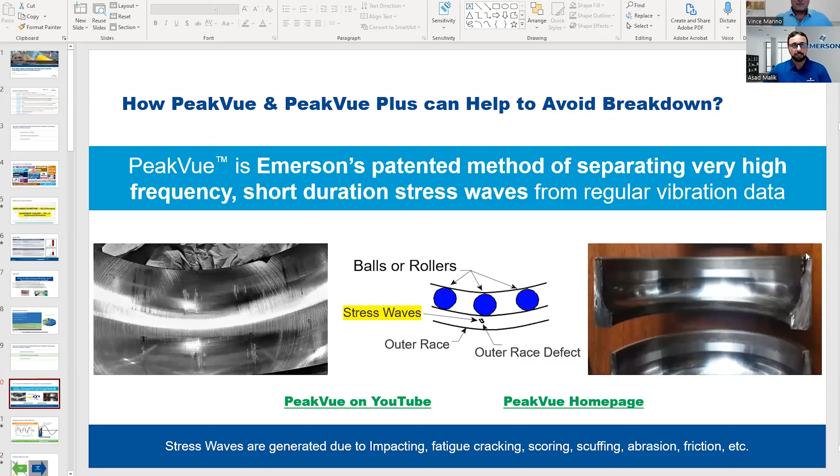Do you have a visual picture of PeakVue? Anything we can pull up to take a look at? Absolutely, not a problem. Let me share a screen, because sometimes we say seeing is believing, so I'll show that.

Do you see my screen, Vince? I do. I'm just adjusting where we are on the screen a little bit so I'm not covering up any vital information. Let me do this. Okay, all right, yes, please continue.

So PeakVue is a very specific patent technology, a special method of separating very high frequency data, also called stress wave data, from the low frequency data. The low frequency faults are things like unbalance, misalignment, and looseness, which are normally picked up through the velocity spectrum using different products. When it comes to very specific high frequency information, those very short duration events in bearings specifically, we use a specific filter.

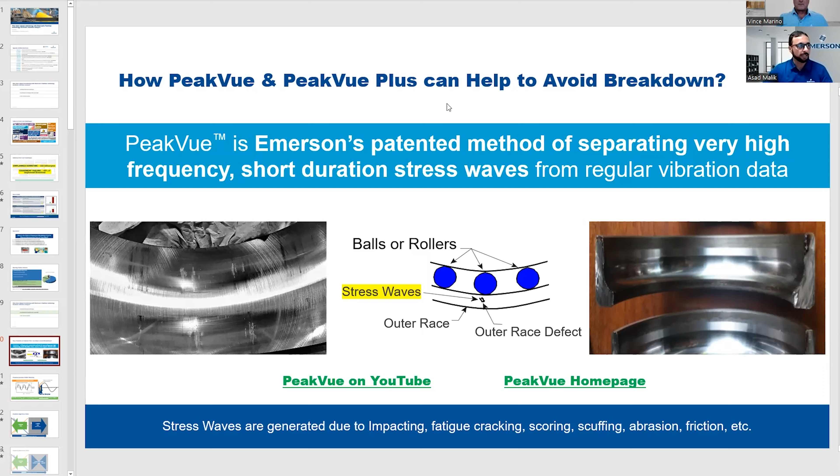Maybe on the next slide I can show a bit more about how it's used. If you see, the sampling rate of that technology is around 100,000 samples per second, whereas normal vibration data collection uses around 2,500 to 5,000 samples. So PeakVue Plus uses a very high sampling rate, about 20 times more than normal velocity data collection.

If you see on the screen, this is the sampling method. Any short duration peak that comes in will be detected and held as is. So these are a few things specific to PeakVue: using a very high sampling rate, a specific technique inside, and a high pass filter to bring that data to the analyst in a way that makes it trendable.

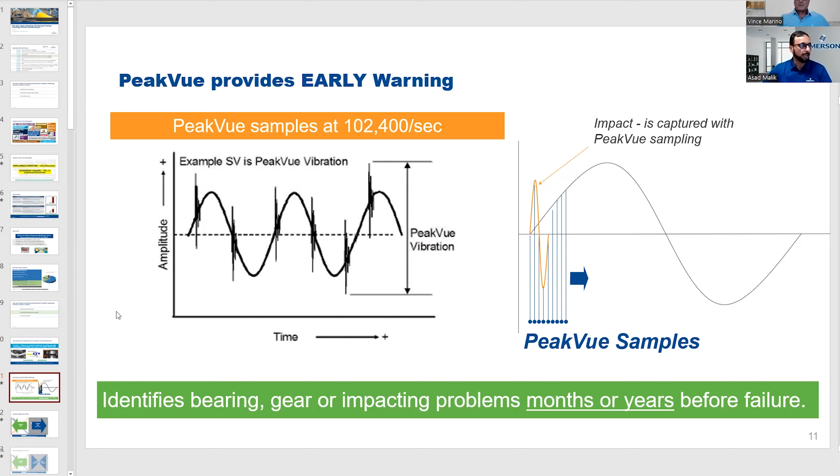When we talk about rolling element bearings, they normally have four stages of failure: stage 1, 2, 3, and 4. After stage 3, the bearing becomes unpredictable. It can fail today or tomorrow—you cannot predict it. If you get that predictive knowledge at that stage, it's already too late.

The purpose of all these predictive technologies is to know about the bearing or lubrication fault at stage 2, sometimes stage 1, so that you have good time—months or weeks—to plan, because breakdowns are very expensive. You need to change resources, and sometimes the parts are not available. So the earlier the information, the better it is to avoid any failure.

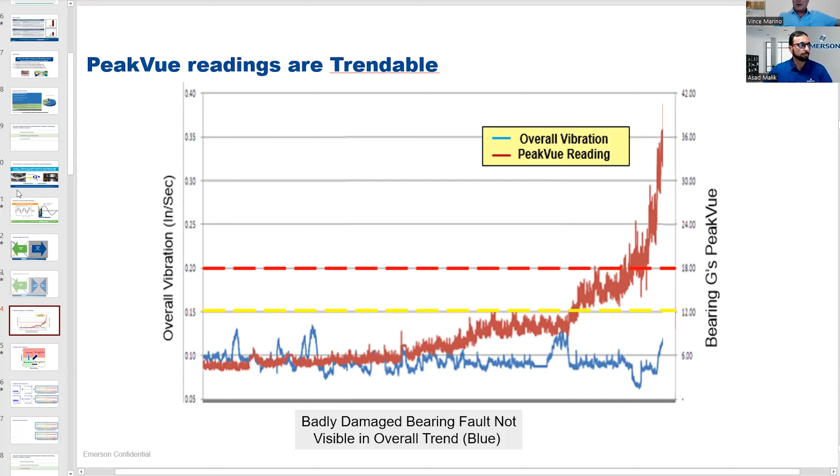I have data to maybe share later on. Actually, I'd like to go down that rabbit hole if I can, and just ask you—pre-PeakVue, how much cost and financial impact was company X experiencing, and how did that change after installing PeakVue? Is it something... yeah, here you go, it looks like you have some measurements here. I'm going to move this out of the way a little bit.

This unplanned downtime cost does not include the production loss. This is the cost they have to pay by arranging the crane for replacement, arranging the crew, paying overtime, and sometimes when you have a breakdown, rather than 2 people, you want to put 3 or 4 people to complete the job as fast as possible. But 25 to 50% of the resources are wasted even before you start dismantling the machine.

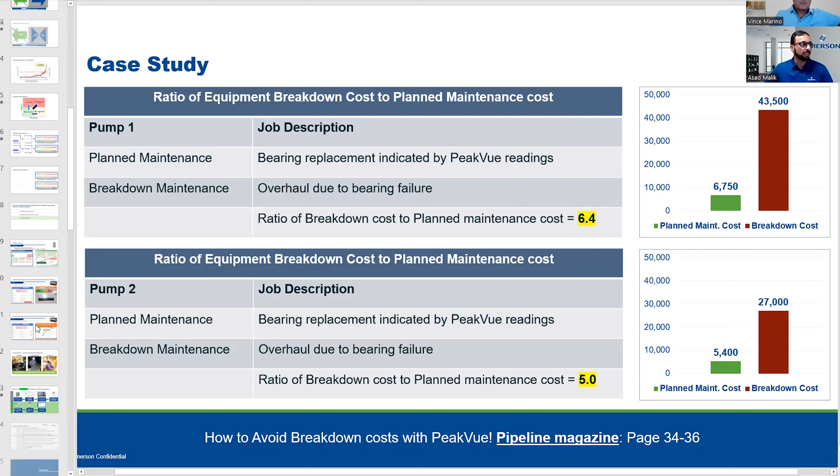I can share, I have even some case studies, very interesting case studies. Yeah, I'd love to see these. This is the kind of thing that, inevitably, every time I do a lunch and learn, my main focus and my goal is to preserve information for the future. Hopefully someday somebody will search on YouTube for a solution like this and find this a valuable resource. So the only way to do it is really to just talk through it.

Now this is an actual case study. Before I go into PeakVue, I also want to talk about PeakVue Plus, which you'll see here. PeakVue Plus is part of the analytics built in by Emerson, so that any person who doesn't have much advanced or category 2 level experience in vibration analysis can easily understand. Let me take you through this example, and you'll see - even if you're not a vibration analyst, you can look at that graph and say, oh yeah, I can understand there is a problem.

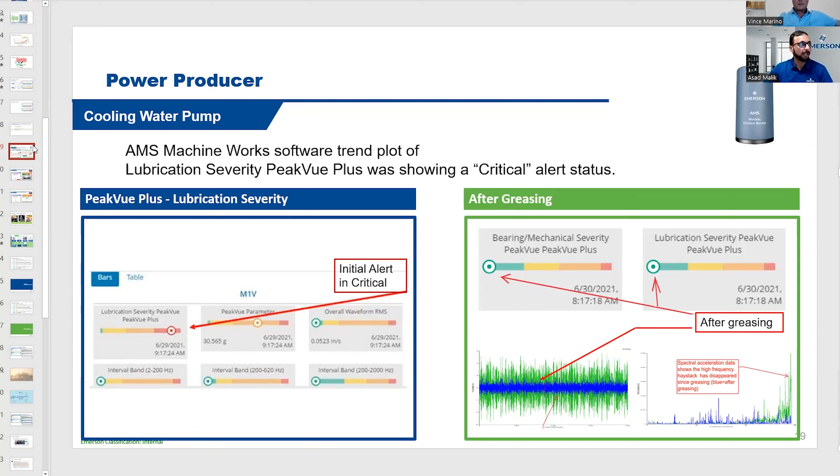Maybe during our conversation I'll give you a quick detail of what's happening in the background to bring this. Sure, yeah, go ahead. Let's just dive right in.

I'm loving this. So that device you were showing, is it magnetically attached, or can it be attached virtually anywhere on the rotating equipment? Absolutely, it can be magnetically attached or it can be screwed. There are different ways you can install it.

It makes me wonder why virtually every piece of moving equipment doesn't have that on there, or something similar, to monitor, instead of just waiting for the screwdriver technique later, which means it's too far gone. I would imagine more of your high value items are where it's necessarily needed, but virtually anything could utilize that and benefit from it.

Yes, Vince, that's really an interesting time for the industry. If you ask me 10 or 15 years ago, the wireless technology, pervasive sensing, was not mature enough. Now these wireless devices can reduce that timeframe for moving from bottom performers to top performers by using these different wireless technologies and getting insight.

And people are not really much interested, especially the new millennials as well as the new people coming to the industry. They don't really want to go collect the routes.

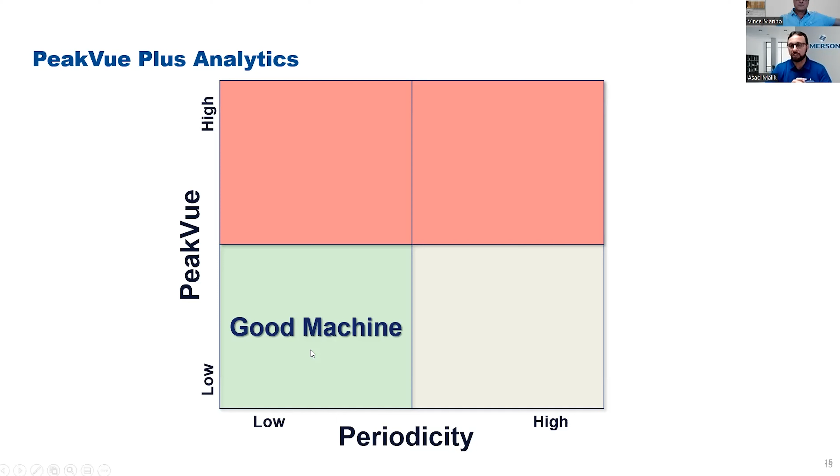But now, as the impacting increases, like in the previous chart I was showing, the green impacting was really at 30, but the repeatability is not much, it's low—then that means it's a lubrication problem.

Now if we have low impacting but high repeatability, meaning the signal is repeating on that same frequency, and that impacting is even low, that means there's a bearing problem, but lubrication is not the problem. But this is at an early stage.

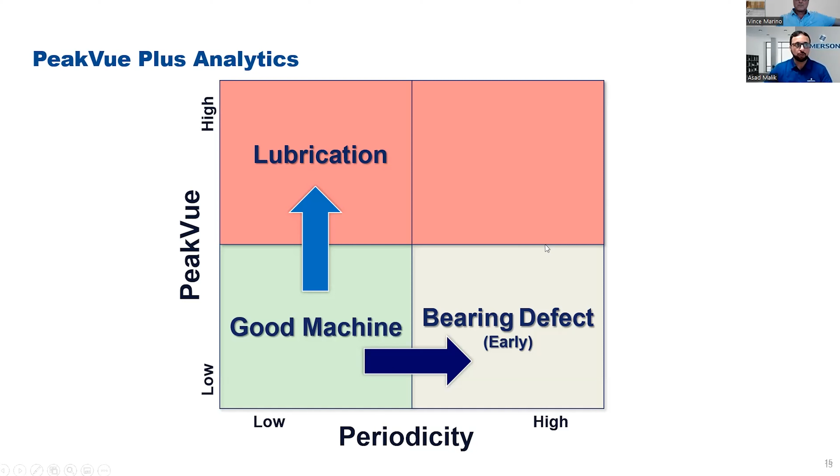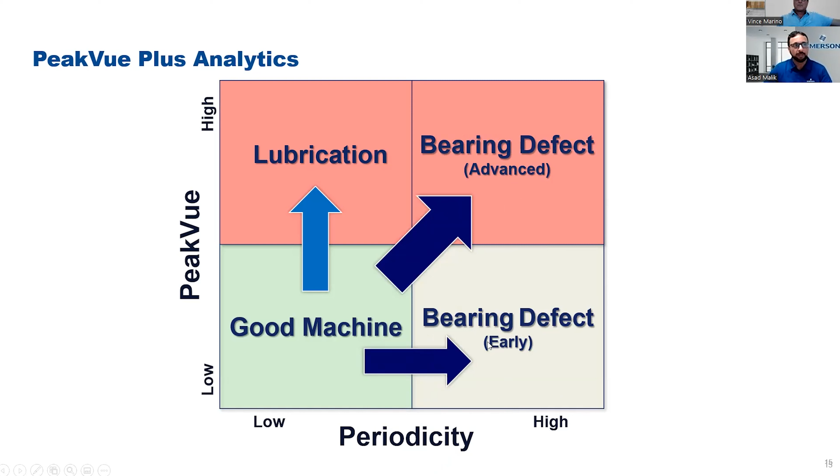Now think of a situation when you have high impacting but low repeatability of that signal, and a high repeatability of that signal. It means now you move from early stage to the advanced stage. And that's all happening behind the scene of PeakVue Plus.

Let me explain this on the chart. On the left-hand side, high impacting, low correlation, means there is an under-lubricated bearing. You will see the lubrication severity, but no damage to the bearing. In the second scenario, we have high impacting but also very high correlation. That means probably the lubrication is great, but in spite of good lubrication, the bearing is damaged.

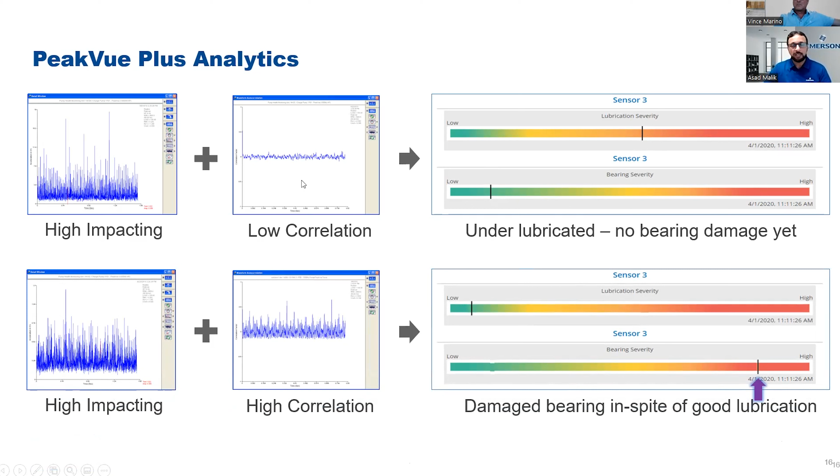The left-hand side is more for an analyst type. If I remove that, and you have no knowledge of vibration, you can look into this green, yellow, red and still tell what's the problem. That's what PeakVue Plus is doing behind the scene, giving prescriptive analytics to operators, maintenance people, or condition monitoring people, so they can distinguish between a lubrication and bearing problem and address it separately to fix. In my previous case study, where there was a problem in the lubrication but the bearing was good, they greased the bearing and the machine was running fine.

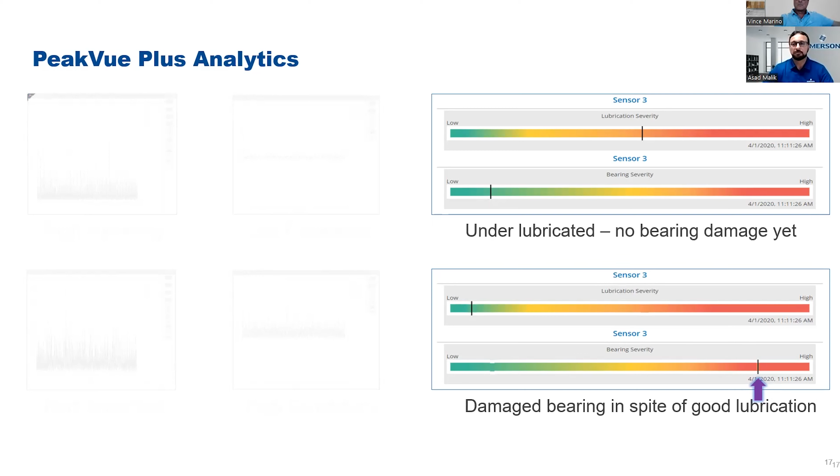I want to show you one more case study now, because this is the Asset Monitor, which is comparatively for semi-critical machines. You can have around 12 channels. Like the wireless vibration monitor, which was a small one where you could have a 3-axis sensor plus temperature, but this one can have 12.

Now this is again a case study with the help of PeakVue Plus. If you see on your left-hand side on the lubrication chart, alignment, bearing, looseness are all green. Balance is green, blade pass frequencies are green, but lubrication is red. And all this is because of PeakVue Plus.

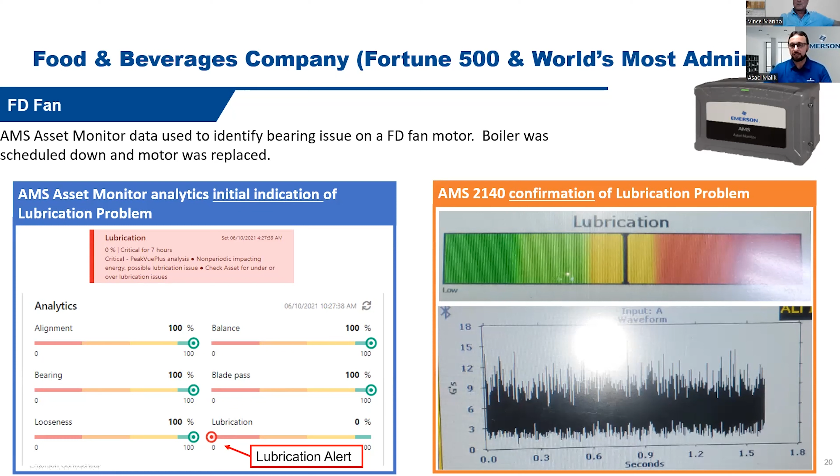Luckily they had a portable analyzer. They used it for exception analysis and found there was impacting. In this case, unfortunately, the bearing was sealed, so they had to replace the bearing. They actually had to replace the whole motor, then change the motor. They could also replace just the bearing, but they have to stop the machine. So they really needed a stoppage. There was no way to grease the bearing while the machine was running, so they had to replace it.

But after replacing the bearing, they rechecked it again with the Asset Monitor, and the lubrication is now green. All other indications were already green. Even if they were not much expert on vibration analysis, they could immediately get the idea from the prescriptive analytics that there really is no problem, because all of the indications are showing green. So very, very helpful.

It's really resonating with the customer needs, and I have received very good feedback whenever we have been talking to customers who had been using PeakVue in the past. They like PeakVue Plus, and PeakVue Plus is built into all the software as well as the hardware.

These screens are basically a software dashboard they can use. With this AMS Asset Monitor, they just need an IP address and they can log in and see live data without needing software. But if they really want to store this information for history, they can use our AMS Machinery Manager software to keep that data safe.

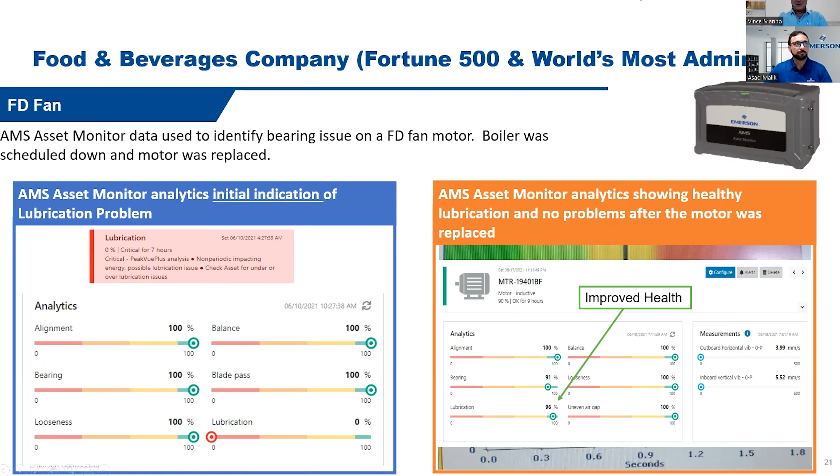Is that correct? It is, yes. So she's using just a smartphone. Yes, that's the beauty of this technology.

You see on the top, the Asset Monitor is installed and it's an edge device. You can get data as close as possible to the machine, install it close to the machine, and that's it. You can get data and transfer it wirelessly. What she's using is an iPhone or a Samsung or Apple phone, and you can get all that information on your phone. So you have the asset health right on your hand, and based on that you can take actions to plan your maintenance activities. Very cool.

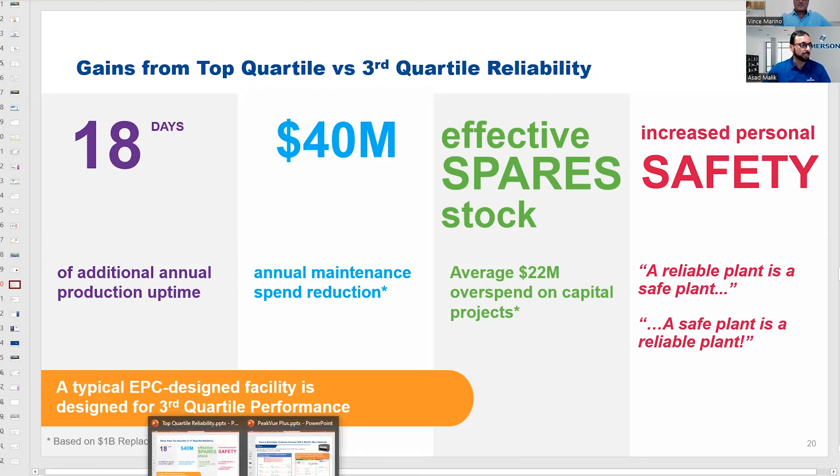Rather than taking the manual shift, the digital transformation brings the data to the person so they can analyze it. That was a quick shift. Maybe I can share something that came into my mind, because you asked about the latest trend. What's really the latest trend? And you can still see my screen, right, Vince?

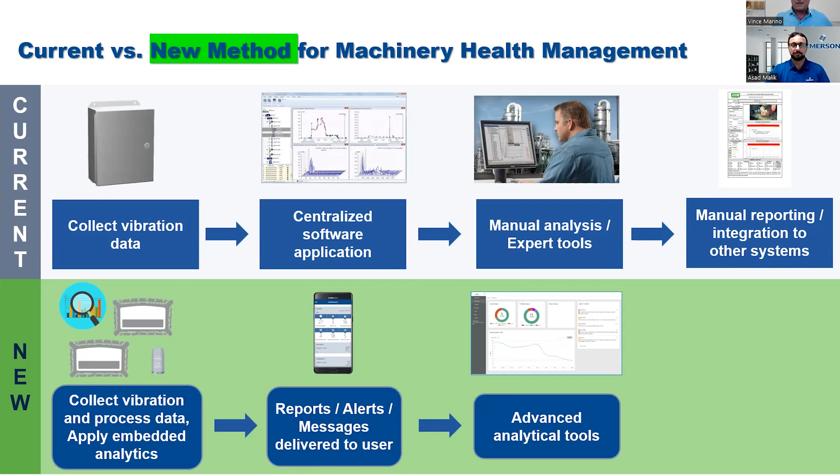If you could stop sharing your screen for one second, I want to just ask you a couple of questions. First of all, I can't believe it, but we've just blown through an hour talking about this. It went by like that.

I mean, I could talk all day. There are so many success stories and so many different experiences. I've been working in 4 different countries, I probably write that in my bio. So I have exposure to all types of industries, whether it's oil and gas, metal mining, cement, or even some chemical plants. Every industry has its own challenges. There are so many success stories and so many challenges, and I'm so glad to be in a position where we help customers avoid unplanned breakdowns and take them from low performing to top quartile companies.

Yeah, I would imagine. Just kind of curious, do you offer some kind of training? Are there any training related events coming up in the future? Part two to that question is, do you have any trade shows you'll be showing up at in the next 3 to 6 months? Maybe you can answer both of those.

Yeah, we have a calendar published on our Emerson website for the trainings. Some of the trainings are certification trainings, if someone wants to take a path from vibration analyst category 1, 2, and 3, but there are general trainings also available. And now we also have virtual trainings, if a company doesn't want to send people, which isn't always easy, to take 5 or 6 people out of the plant.